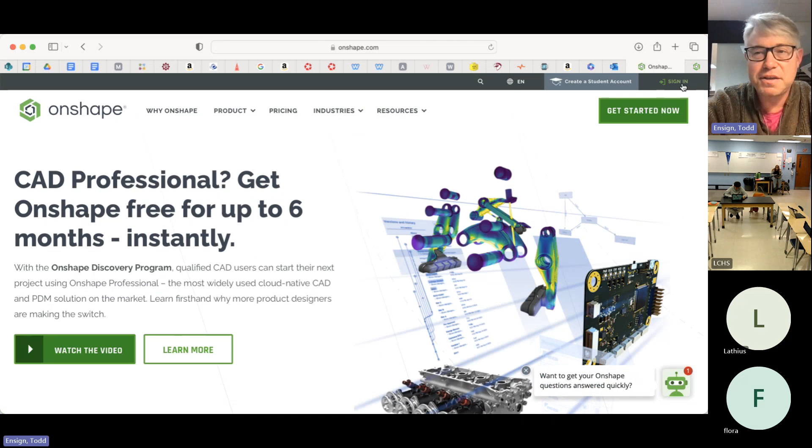Once you've created your account, you get to this page, which is OnShape, and you'll click on the top right corner, sign in. It's not important that you follow along with me right now. What's important is that you take some notes. Maybe if you want to try something out, that's great, but basically what's really important is that you take some observations and notes.

The next thing that we want to do is open up apogeerockets.com, because using measurements are critical to the success of this program, and I often need measurements.

So the measurement that I need right now is that I'm going to build something simple. I'm going to build an engine tube and a centering ring. So we'll start from the bottom of your rocket. The body tube on your rocket is a BT80, correct? Yes, Todd. So I'm going to go to building supplies.

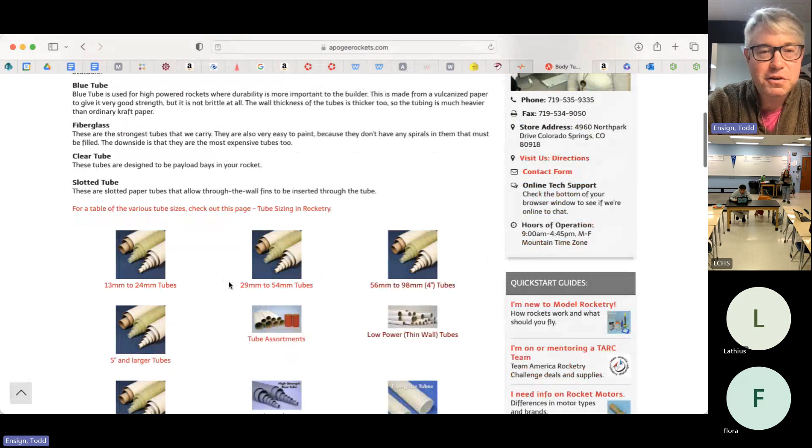I'm going to go to body tubes, and I'm going to look for 56 to 98 millimeter tubes. I'm going to scroll down until I find the standard BT80 right here.

Now the reason I like this website is, drum roll, this little box right here. Tim Van Milligan, also known as the Rocket Guy, or Rocket Man, takes very careful measurements and publishes them on his website. So I need to know the inner diameter of a BT80 tube in order for me to make my next series of parts. It's 65 millimeters.

So note number one, make your OnShape account. Number two, everything you do should be in millimeters. Every 3D printer I've ever worked with in my life defaults to millimeters, so please just get used to dealing with that.

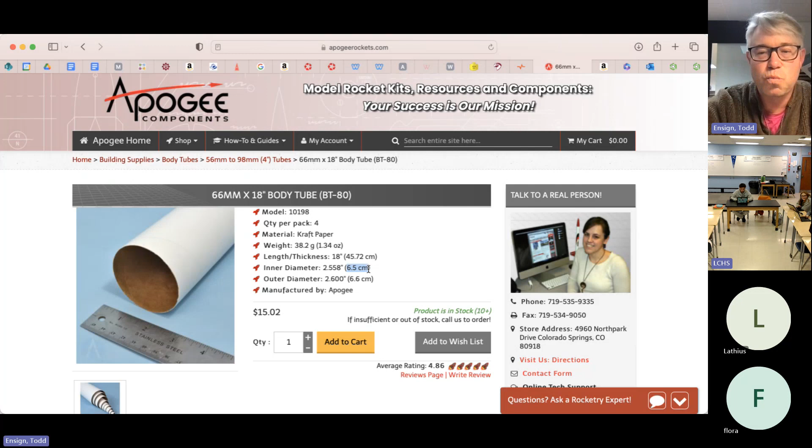2.58 centimeters is 1 inch. Write that down. 2.58 centimeters, or 25.8 millimeters, is an inch. Or is it 25.4? Someone check me on that. Someone Google that. I think it's 25.4, 25.8.

So what we're going to do is create an engine tube and a centering ring. To create a new part, I hit create on the top left, I hit document. I'm going to call this a 29 millimeter engine tube, and I'll say demo just because I know what it is.

Now, with an engine, I assume you're all going to use 29 millimeter engines. I have a free tip: if you're not using a 29 millimeter engine, you might use a 24. Still build your rocket with a 29 millimeter motor mount. Why? Anyone know why? Anyone? Bueller? Why would I always build a 29 millimeter motor mount, even if I'm going to use a 24 millimeter motor?

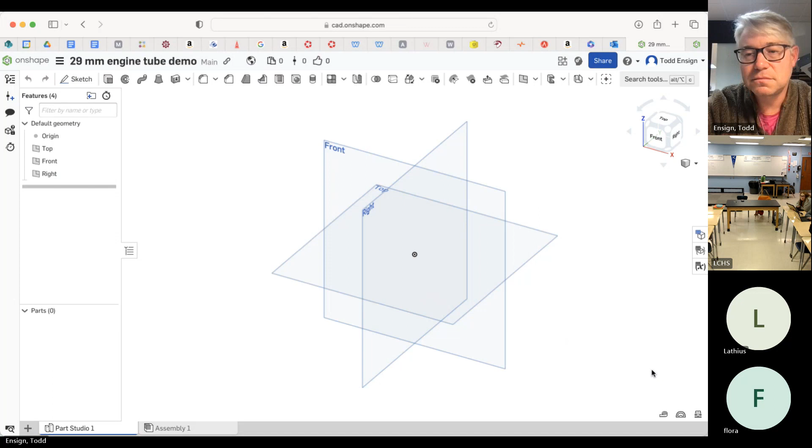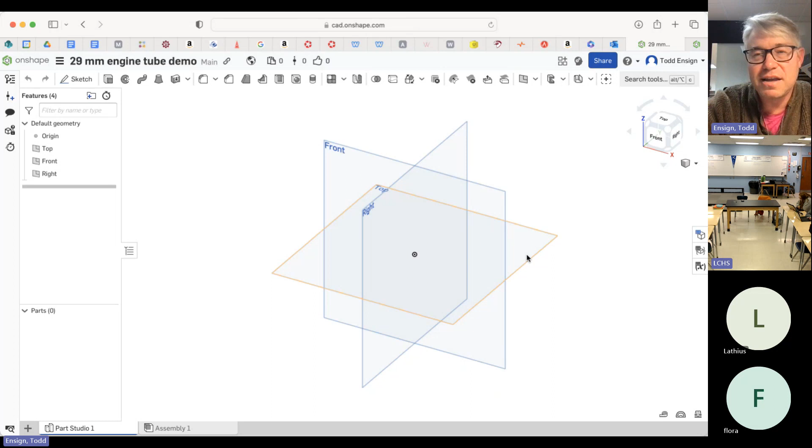Any ideas why? Can you put a 29 millimeter motor in a 24 millimeter engine tube? No, sir, the motor is too large, it will not work. But you can put a 24 millimeter engine in a 29 millimeter tube with a small adapter. So you can print a 29 to 24 millimeter adapter, even if you have any rocket. So always build with a larger rocket engine diameter and step it down with an adapter if you need to.

Okay, the first thing I do when designing this engine tube is click on the top work plane. There are 3 work planes: top, front, and right. I like to also hit this little orientation box and center myself up.

Then there's a button right here, and if you've never used 3D CAD tools, they all have the same basic functionality. You start with work planes, you sketch out what you want in 2 dimensions, and then you make it 3-dimensional. And if you want some icing on the cake, you can then tweak your 3-dimensional object. But first thing I'm gonna do is click the sketch button.

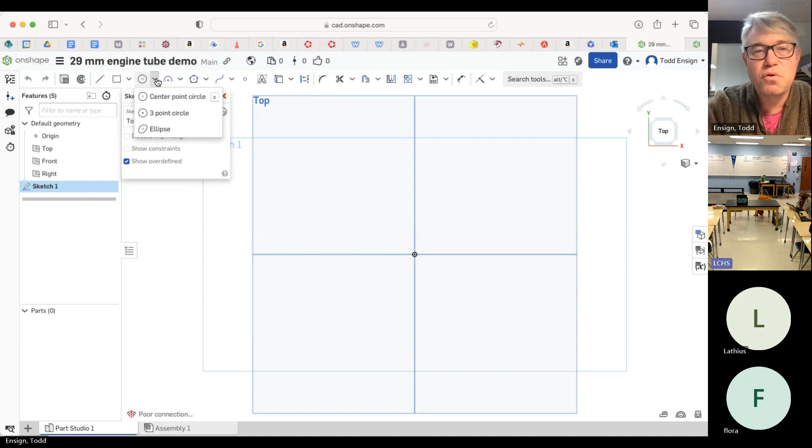Now a whole palette of tools popped up that were not there before. These tools are basic shapes: lines, squares, circles, arcs, inscribed polygons, splines, etc. What I'm going to do is choose circle, and there's a variety of circles. I want center point circle, that's the default one. I'm going to click inside on the origin and start to draw my circle.

Just note, I tap with my mouse button once, and when I do that, I have no idea what the measurement is right now. It's 53 millimeters, but by clicking once, it enters an edit mode. Now the diameter of the engine I'm going to put in is 29.

If I make this exactly 29, it'll be a tight fit. You may not get your engine in and out of your engine tube. So I'm going to go 29.1. I type those numbers on my keyboard and press enter. I've now made a 29.1 millimeter circle. I'm going to do that again.

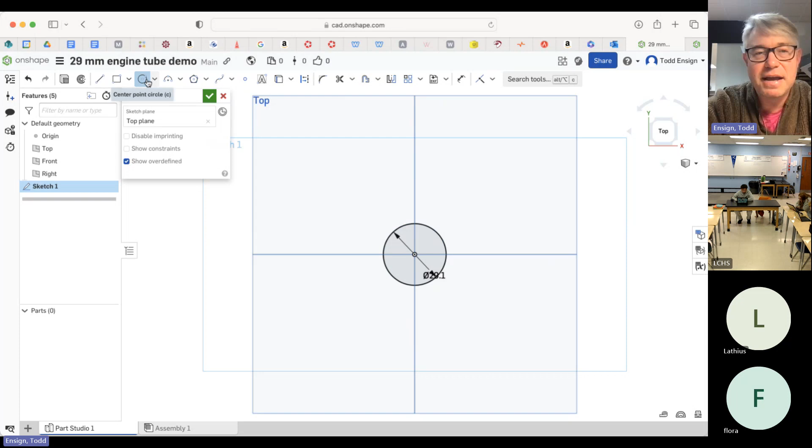I already have the center circle button on. I click, I drag. Now here's where you need to do some math. How thick of a wall do you think we want on an engine tube? What is your guess? How many millimeters would you like?

0.61 millimeters - so that's if you were doing a paper tube, right? That's what you're looking at, the measurements off of Apogee Rockets. But we're not doing a paper tube, we're doing a plastic tube. If you do a 1 millimeter thick tube, you could crush it with your hand easily, you could break it - that's probably not strong enough. So 3 millimeters is a little overkill for a tube.

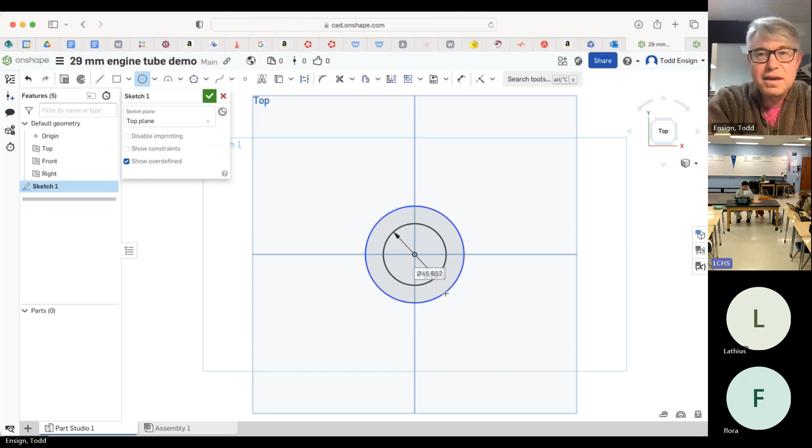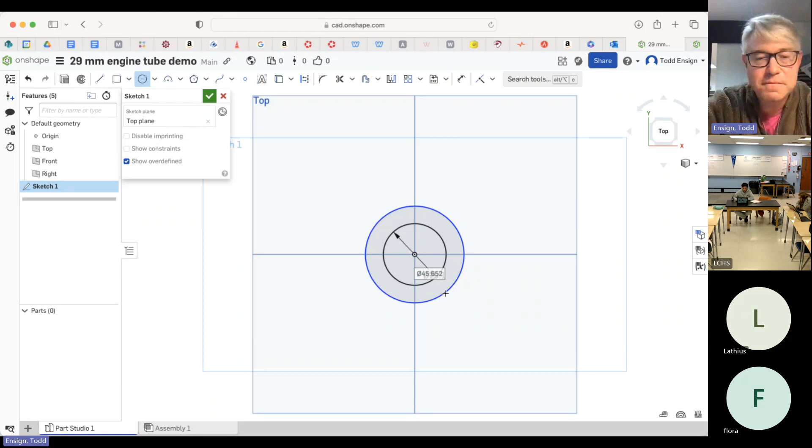So I'm going to suggest 2. If we had a 29 millimeter hole in the middle, I realize it's 29.1, and we put a 2 millimeter thick wall on each side around this, it's not 29 plus 2, it's 29 plus 4 to get the outer diameter of this tube. So 29, 30, 31, 32, 33. So 33 millimeters is going to be the outer diameter of my engine tube - that's just slightly less than 2 millimeter thick walls.

When I'm done with a sketch, I click the green checkbox - that means I'm done sketching. Over here on the orientation box, I'm going to say isometric so I can see it. Now the palette of tools has changed again - these are all tools that affect a 2-dimensional object and turn it 3-dimensional.

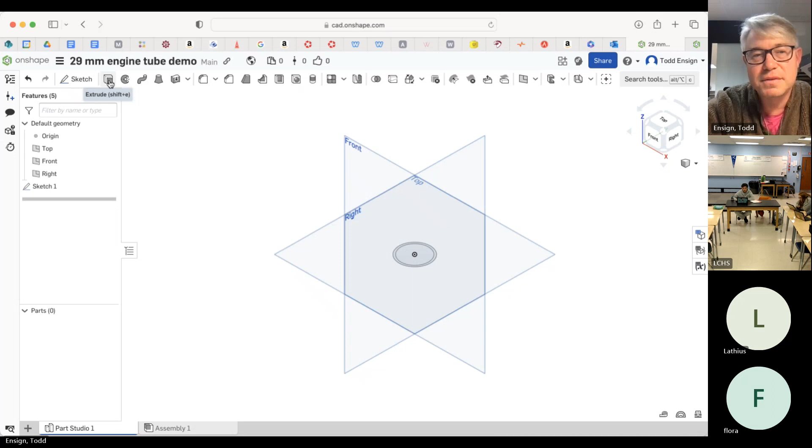The most commonly used tool is - anyone? Extrude. I click extrude and it defaults to making a new material, solid, and it says give me a shape - what do you want to extrude? So what I want to extrude is the space between these 2 circles. I click on that space and it extrudes it out.

Now extrude is like squirting something out of a shape. I don't know if you ever played with Play-Doh when you were a kid, but my kid had a Play-Doh device where you'd shove Play-Doh into a little piston. You put different shapes like a triangle, a circle, or whatever, and then when you push it, it would squirt out the Play-Doh in that shape. If you haven't seen that, I'm assuming you've all brushed your teeth - when you squirt your toothpaste out, it comes out in a cylinder, right? It's not a cylinder inside the toothpaste tube, it's just coming out of a round circle opening.

And so we're extruding or squeezing material out. Ironically, this is what a 3D printer does to a certain extent - it extrudes out a tiny little nozzle of plastic.

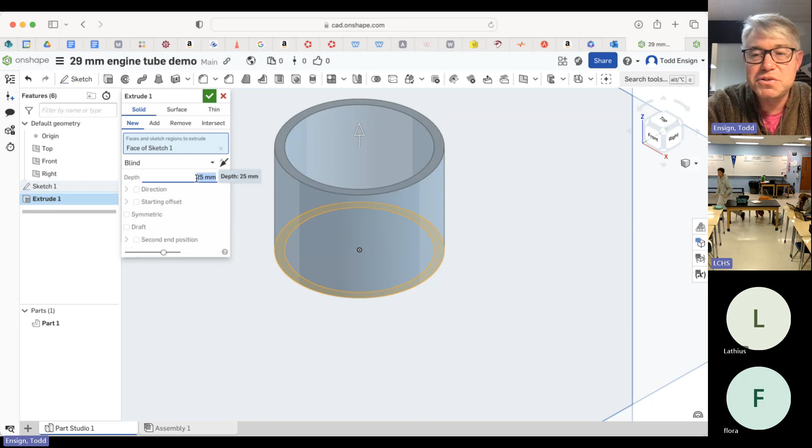Now it says my default guess - the software is guessing 25 millimeters high. I'm telling you right now that that's not big enough for your engine. Most engines, if you start looking them up, your F engines are going to be at least 70, 80 millimeters. Let's say 100 millimeters. I've now created a cylinder that is 100 millimeters long.

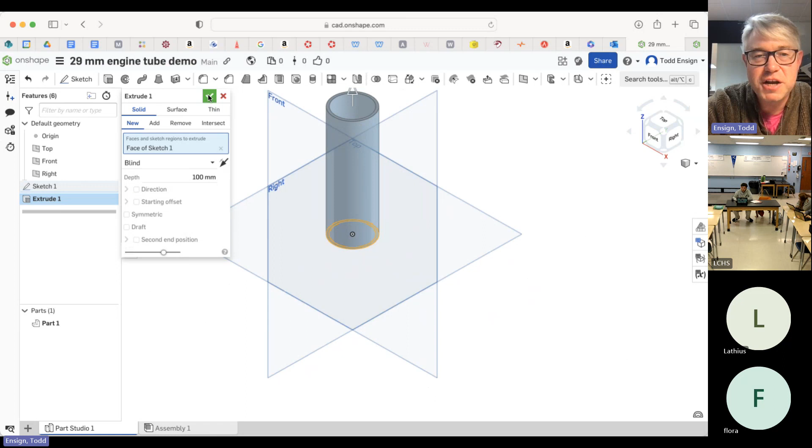I'm going to click the green checkbox again. That was it, we did it. We drew 2 circles and we extruded it - 3 steps, actually really only 2 steps.

For those of you who have not done 3D CAD before, what do you think? Is this easy? Is it scary? Is it confusing? Simple? How are you feeling? It looks pretty simple, pretty straightforward, huh?

Yeah, now let me show you how to get this to a 3D printer. I have a part, and because we're on OnShape, it's already saved. Down here is our feature tree - it shows us all of our work planes, it shows us our sketch that we made, it shows us the feature we did called an extrusion, and then down below it shows 3-dimensional parts that were created.

I click on that part - see how the whole part's highlighted? I'm going to right click on that part, and one of the options says export. If I export it, it says what do you want to call it? I'm going to call this an engine tube.

29 millimeters. The format is STL, that's what 3D printers are going to read. Units are millimeters. Resolution.

Now this is a critical thing here. Not all software works the same, but if you're drawing a cube, it's just all 90-degree angles. You could go with coarse resolution because an STL file is made of triangles, and a cube would have 2 triangles on one side, 2 on the other. It could have the lowest resolution.

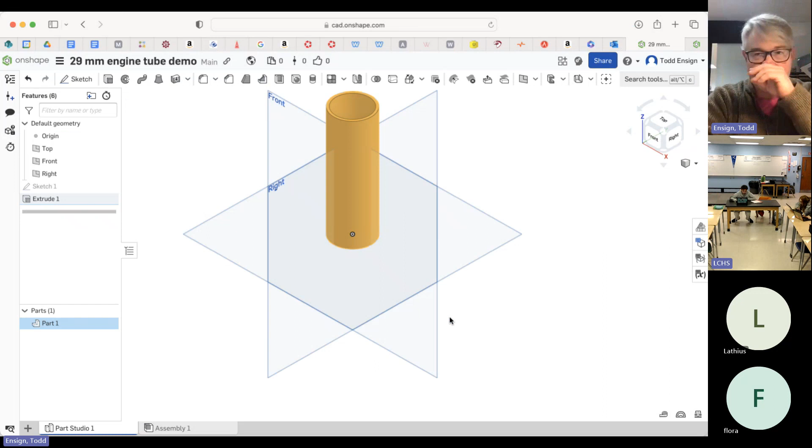So choose fine resolution, and it says download. I'll go ahead and export, and that should create the part. It downloads it, and if I look in my downloaded files, I will see it.

I'm now at this point, I think you might not see what I'm looking at, so I can open that file up. I downloaded it to my computer. That's how I get the shape I designed out as an STL. Any questions?

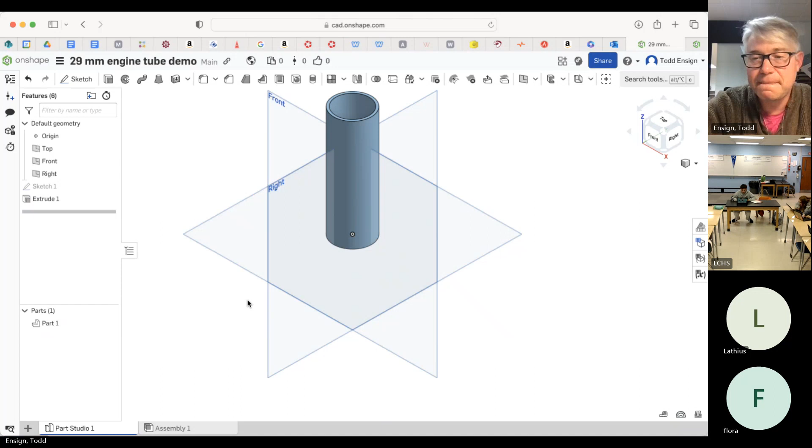Let's make a new part. I now have the engine tube to stick my engine in, but I'm going to create the centering rings. These are going to be BT80, and they're going to be 33 inner diameter, which reflects the engine tube they're going to connect to.

Now, if you were lost last time, watch quickly. I'm going to click on the work plane, square up to it, go to the sketching tool, go to the circle tool. Centered is default already. Okay, I'm going to draw a circle.

Now the inner circle is going to be 33 — that's the exact dimension of the outside diameter of my engine tube. And a minute ago I said, if we're doing an engine tube, make sure it's a little bit bigger so our engine slides in. I want this to be a tight fit, super snug. In fact, if it's too snug, I can just sand it a little bit.

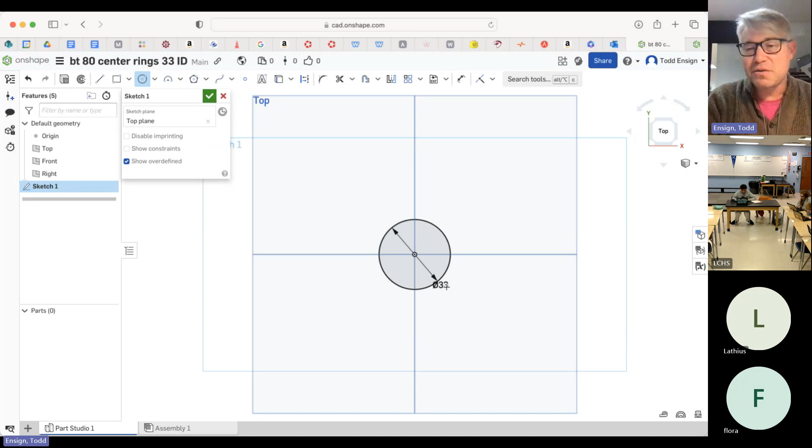I'm not worried about it being a little too snug, I'm worried about it being too loose. So if you make the exact measurement, 33 outside, 33 inside, it should be a tight fit, and a little bit of super glue is going to fuse those things together rock solid. So that's going to be my inner diameter.

I'm going to make another circle, also from the origin. Now how big is it going to be? Good question — what was the pop quiz inner diameter of our BT80 body tube? Want to see that? 65 millimeters, 6.5 centimeters.

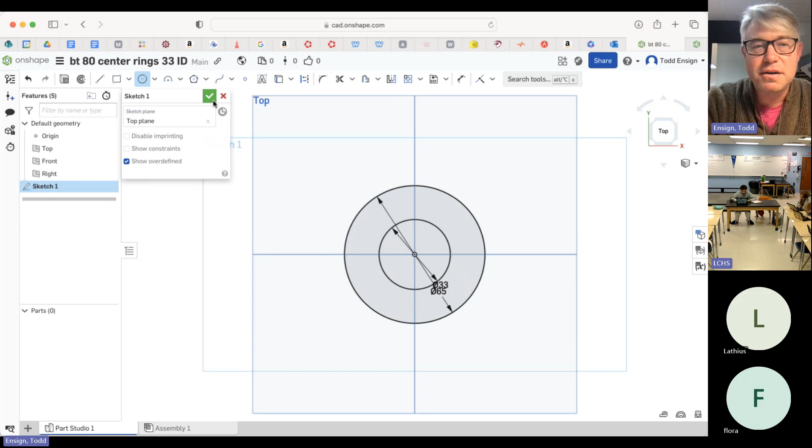So I'm going to type in 65 millimeters here. Again, I want a tight fit. Okay, I'm done, the green checkbox. Let's look at the isometric, the three-dimensional view. Let's go to extrude, the first button right after sketch.

It says, what do you want to extrude, Todd? I click on the space between those two circles. It says — I'm just going to guess my standard guess — 25 millimeters thick. Do you think this looks like a good centering ring to you? Yes.

Okay, let's go to Apogee. Let's go to another Apogee page. Let's look at a centering ring. If you've built a rocket before, usually it's out of a piece of thin plywood. So under shop, we're going to go to building supplies, then centering rings. Let's look at a centering ring for this kind of thing here — we are looking at BT60, BT80 body centering rings.

Okay, this is a centering ring for a 24 millimeter — it doesn't really matter, I'm just looking for the thickness. Okay, thickness: 3.2 millimeters. So these are a thin piece of wood. Back to my drawing, that's currently 25 millimeters.

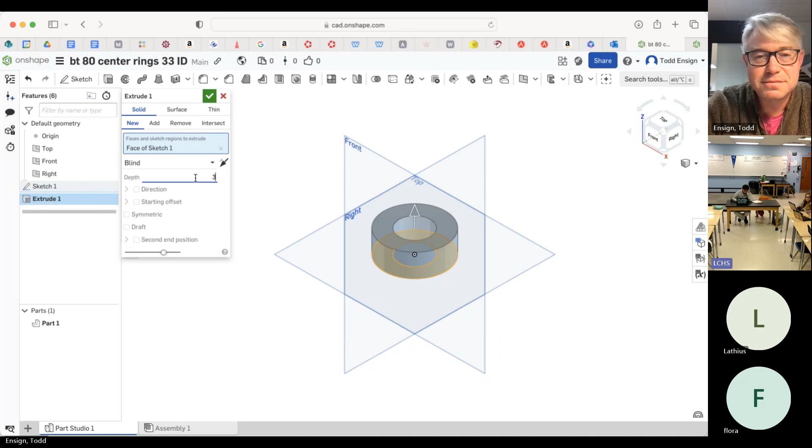I'm gonna suggest to you 3 is fine. If you want to do 3.2, it's fine. If you want to do 4, you're getting a little thick, a little carried away. If you did any more than 4, it's excessive, I would say.

If you did 2, I've broken them. They've destroyed. So 2 millimeters is fine for our cylinder. 3 millimeters is what I recommend for a centering ring.

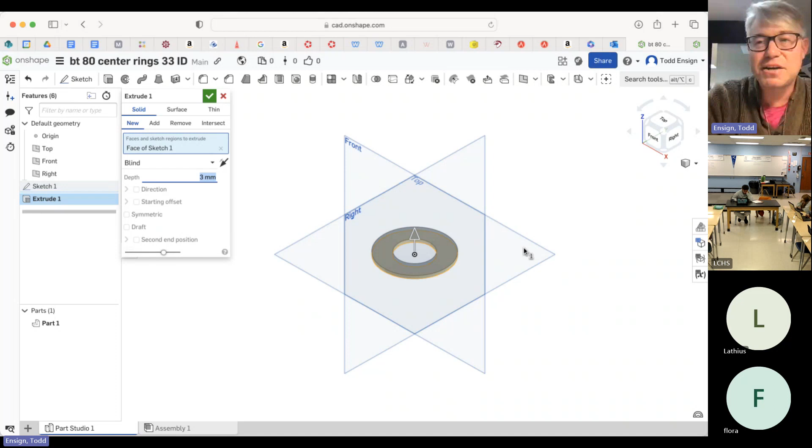So I've extruded it, I hit the checkbox. I export it out by right-clicking. I click on the part, I right-click on it, I say export. STL, fine. I give a name. This is my BT80 center ring for 29 millimeter engine tube. Export it out. Saved. Done. Questions so far?

How are we doing? Question: so you said that it can't go below 2, right, for the center rings?

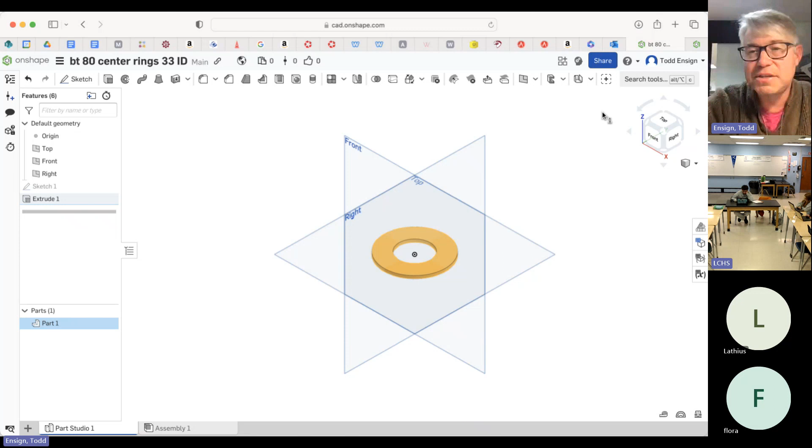I'm giving you Todd's free tip that 2 millimeters in the reality of 3D plastic parts is a little too thin. It breaks. I would suggest 3 millimeters. If you want to do 3.2, which was the exact measurement of this wooden part right here, that would be fine. 4 is probably a little excessive, but if you want to add weight to your rocket, you can do 4. If you're doing more than 4, I think you're getting a little carried away.

All right, thank you. Sure. I'm not sure what's harder or easier next. I think they're both the same. I think I'll probably do a nose cone next.

So we are using a BT70 body tube for our nose cone, correct? I'm sorry, for our payload bay.

So what I'm going to do is pull up this Apogee Rockets page. Let's go back one page. Let's find our BT70 body tube. Here it is, here's my measurements. The inner diameter is 55.4. My outer diameter is 56, apparently. Okay, so these are important measurements for us to know to make our nose cone.

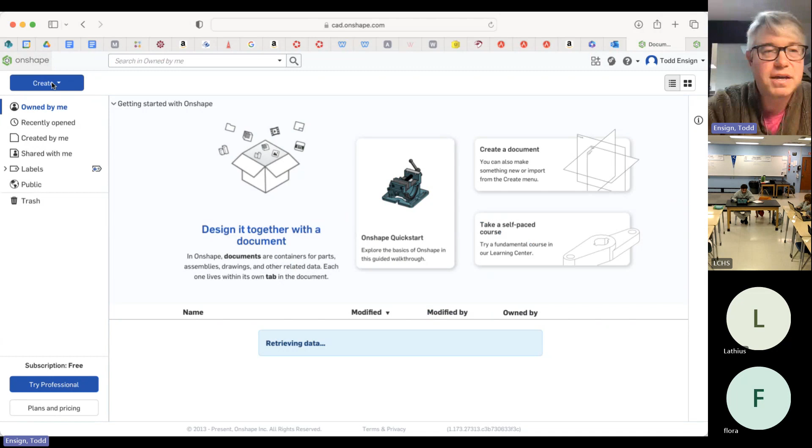So we'll go back to OnShape. I'm going to make a new part. Click on the word OnShape, click Create, click Document. This is going to be a BT70 nose cone.

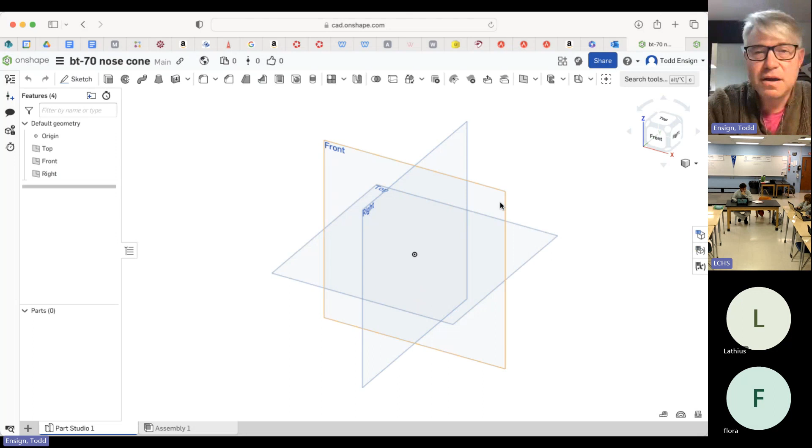Now I'm going to need your help with me, I have some math to do. I'm going to work with the front work plane, square up to the front. I'm going to click my sketching tool. We are going to create half of a nose cone, a bilateral, cutting it right down the top.

The first thing I'm going to start with is the very bottom, and this part I can start without too much guesswork. I know that my BT70 inner diameter is 55.4. Can someone tell me what is half of 55.4?

27.7. Great. So I'm going to go to my line tool. See this little line tool? Click on that. I'm going to go to the origin, snap, and start drawing my line. It doesn't matter what I do because I'm going to tap my mouse once.

I'm going to type in the number. You said 27.7? Yes, sir. Enter. I made a line, 27.7. It shows the dimension there.

This is half of the part of the nose cone that's called the shoulder that will slide into the body tube. I recommend that you go up at least an inch. It's 25.4 — my brain was glitching before. 25.4 is 1 inch, right?

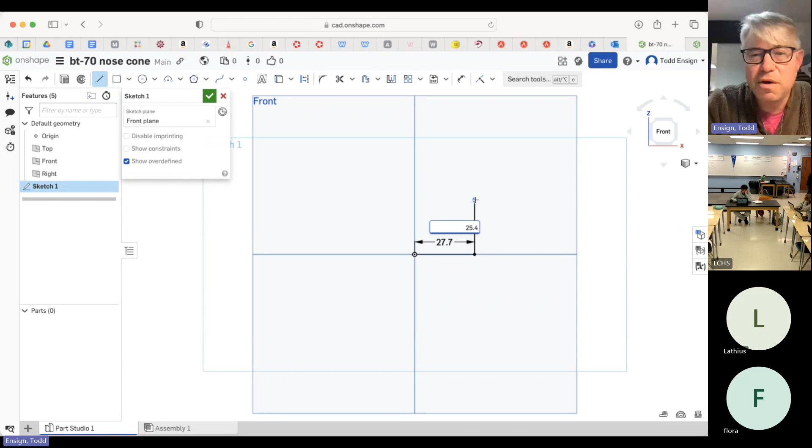So let's just say I go up 26 millimeters — it doesn't really matter, but something along those lines. We'll do 25.4 to be exact, 1 inch. So 25.4 is exactly 1 inch in millimeters. So that's how high up this shoulder is that's going to slide in.

Now I like to give at least a 1 millimeter lip here. So I click on the button right here, I type 1, there's that little tiny lip. Now I'm going to press the escape button and let go of this line.

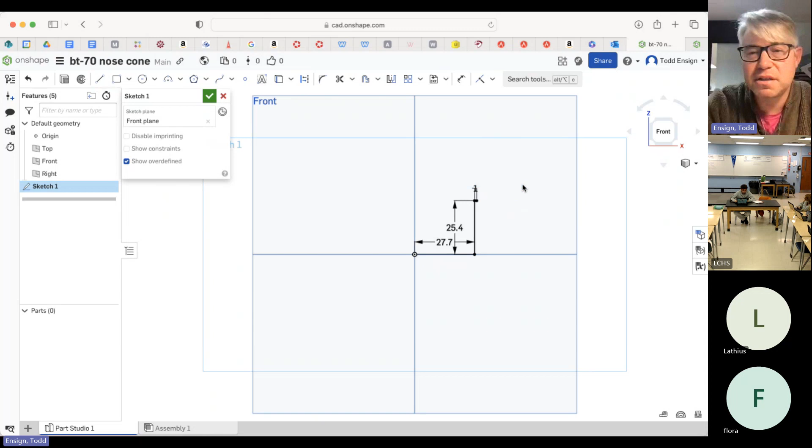The next part is how tall of a nose cone do I want? Question: how tall can your 3D printer go? Anyone know? That's the limiting factor here.

Now, if we looked at Apogee Rockets and said, okay, give me a nose cone example so I have some idea of what a common nose cone is going to look like — Apogee Rocket seems slow today. Go. 24 millimeter tubes to 54, 56. Okay, so I think that's us right there. Here's a BT70 nose cone right here.

So how long is the shoulder? They say it's 58 millimeters. Too long. And they say the length is 267 millimeters. I'm just moving the decimal place one place over. 26.7 centimeters... 26.7 centimeters. That would make a nose cone.

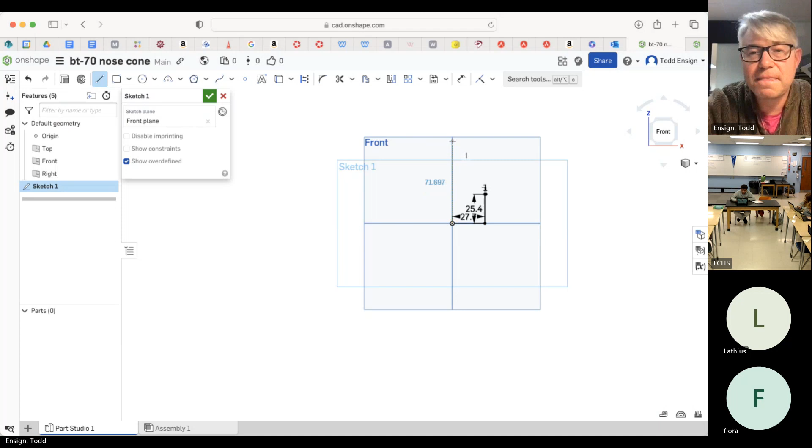I'm going to click on the line tool. I'm going to start drawing a line from the origin straight up. Okay, and so I'm going to press escape again. Actually, no, I'm going to have to have a number. 250 millimeters. And now I'll press escape.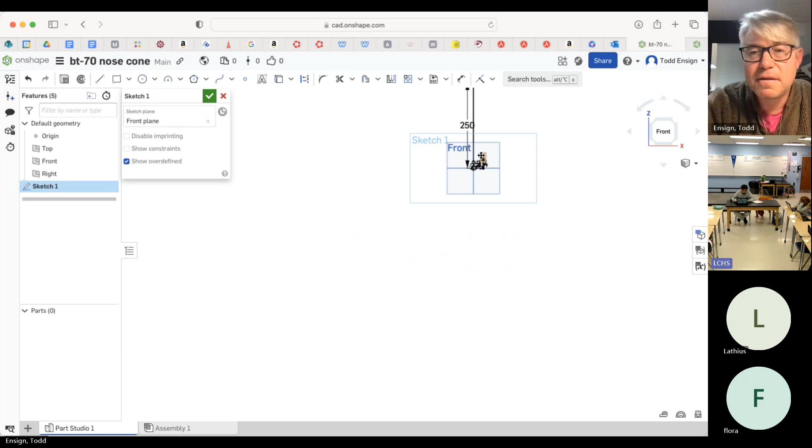So what I've got now is I have a shoulder, and then I have this tall nose cone area. And you're probably thinking, I don't get it, Todd. It does not look like a rocket to me yet.

What I'm going to do next is zoom in on that little dot where I have that 1-millimeter lip. I'm going to look through my tools for drawing. I have line, rectangles, circles, arcs. Arc sounds cool. In my arcs, I have 3-point, tangent, center point, elliptical, conical. I'm going to try a 3-point arc.

I'm going to click 1 point of my 3 points on that outside little lip of that 1 millimeter. I'm going to click the other dot of my 3-dot arc on the tip of my nose cone, which is that other end of that line I just drew. Now my third point is the one where I'm going to figure out where to put it. Up to me where I put that.

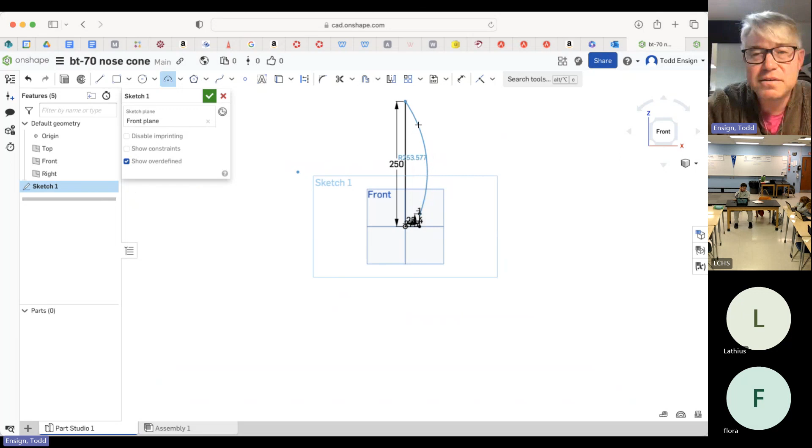So I can control the shape of my nose cone right now. I can have it look like the top of a Russian church. I can have it scoop in like that, what looks really pointy. I can have it kind of linear. I can have it kind of curved out from whichever point I want. I kind of like this, this is looking good to me.

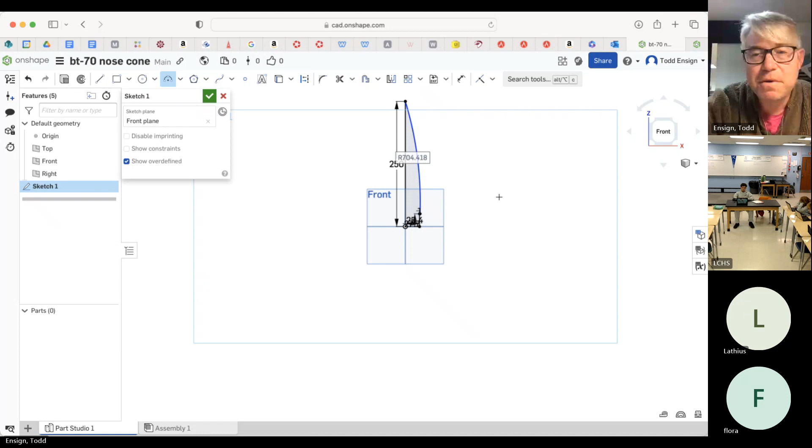This is not a measurement right now. I'm just doing it by feel, but I did a 3-point curve. Can everyone see how this shape just colored itself in? It's now filled in gray. That means the software is telling you, you have a shape with all the sides closed. In other words, I don't have an opening anymore.

This is a shape that can be manipulated in CAD. If I failed to touch 2 dots and had a space between them, this would not fill in, and I would be in a bad place right now. I have to go figure out where I missed. I have to probably do an undo button. There's an undo button right over here. So if you mess up, undo is your friend.

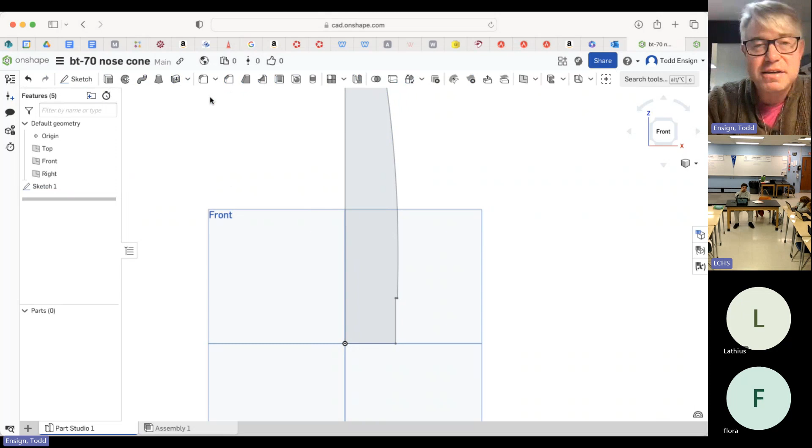I'm going to click the checkbox. So now I have this 2-dimensional half profile of a nose cone. Does anybody know what I'm going to do to make this a nose cone that I can put in my rocket yet? Do you know what feature I'm going to use?

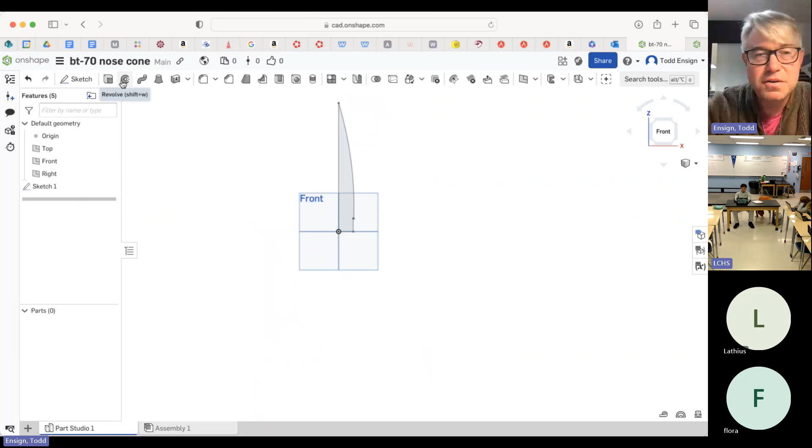Extrude, revolve, sweep, loft, thicken. Any one of these? Extrude. The answer is revolve. Click on revolve, and it says, okay Todd, what shape are we revolving? Give me the profile that I'm going to revolve. And I choose this shape.

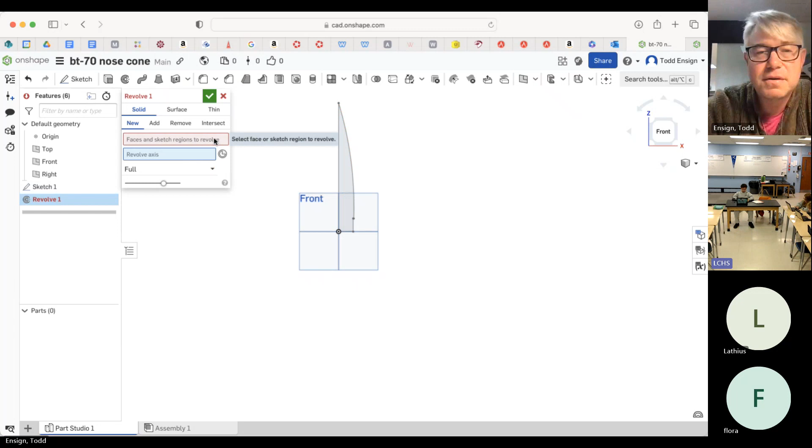Then there's a red box that pops up and it says, give me the axis. What am I revolving around? And I'm going to click on the very long axis of the middle here. Oops, didn't do it. Faces, axis, and then faces.

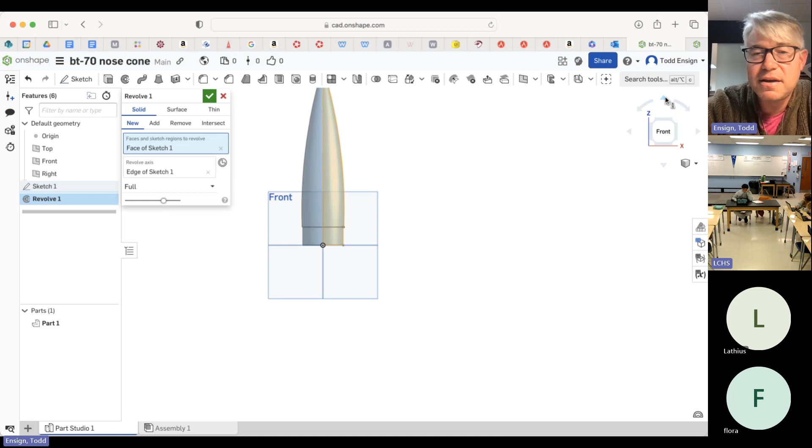Like I said, I have to click on the box and tell it. So I click on the face, and then I click on the axis, and it says, oh, I think you want to make a shape like this. Does anyone see how this is now a nose cone? And you can see, interestingly, there's that little profile, and then it's spun around this long axis right here. I click the checkbox, it's great.

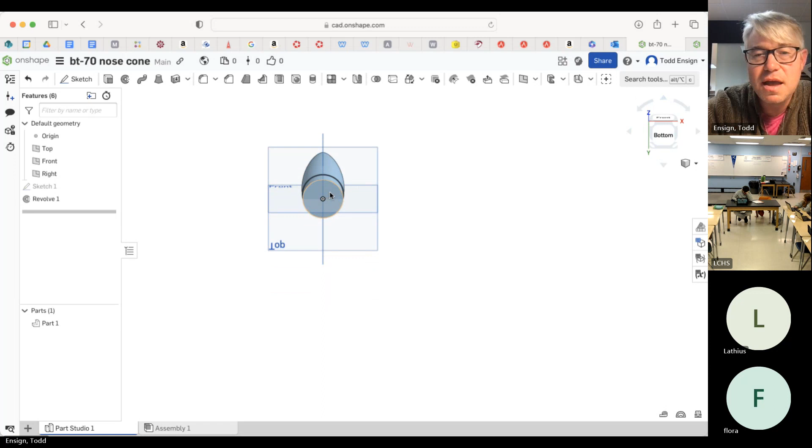Now, the one problem I have is this is a solid plastic nose cone right now, literally filled with plastic. This would be a little too heavy for us. So I'm going to spin this around using my navigation tool. I'm going to click on the bottom. So I've now highlighted the bottom of this nose cone. And look at these features.

I have additional features that I can apply to already dimensioned objects that are 3D. I can curve the edges. I can shave off the edges. I can draft, rib - that one sounds cool. Shell solid - click that. It says, Todd, how thick of a wall do you want? It defaults to 2.5 millimeters.

That's not a bad choice, to be honest. 3 is probably a little thick. 2 is probably a little thin. I'm going to go with their default. I'm going to say 2.5 is cool. Checkbox. I have now made a hollow nose cone.

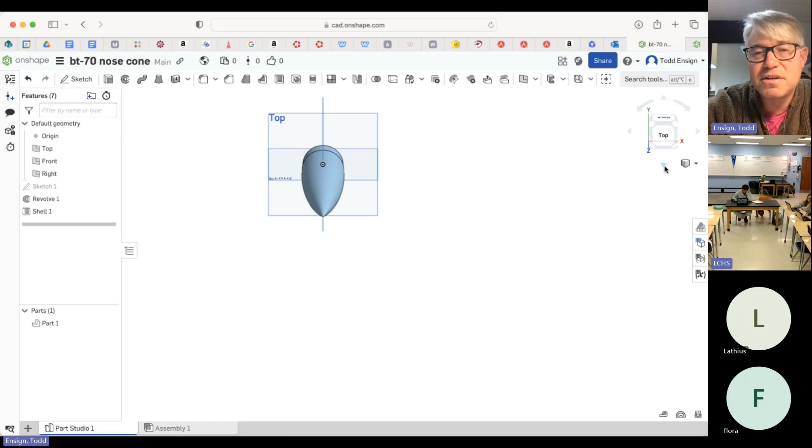That's going to be designed for a BT-70 payload bay. This particular nose cone is 275 millimeters tall, I think. You'll have to look at your printer and see if it can accommodate that. You might print a smaller one, or maybe you'll have even more space. It depends on your model printer.

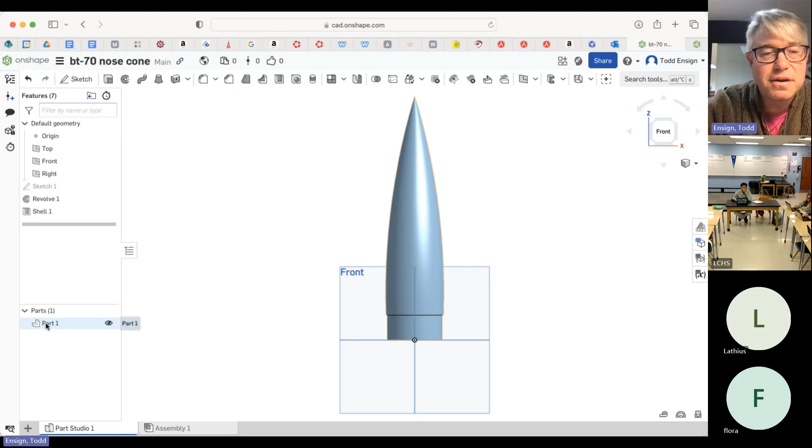To get this part out, I click on the word part, right click, say export, give it a name, BT70 nose cone, STL, fine resolution, download, export that out.

Done. All right, that was a little more complicated, right? Did I lose anybody? How do you feel? Thumbs up, so-so, thumbs down? All right, I got at least one thumbs up.

The last part is the most complicated. So let me see if I can share something else with you. Let's see, stop sharing. Let me jump over to Open Rocket.

After our last session, we had designed a rocket using Open Rocket, and in that rocket we actually had a transition piece. That transition piece has to take us from our payload bay, which is a BT70, a thinner tube, to a BT80, our booster, which is a larger diameter tube.

Let me share my screen with you. Window.

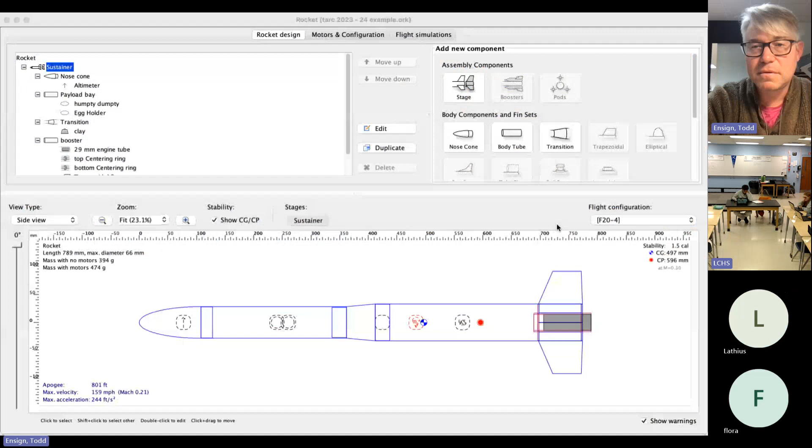All right, we can see it now. Great. So what part am I talking about? I'm talking about this part right here. Can everyone see that part? Yes, sir. Okay, let's look at that in 3D.

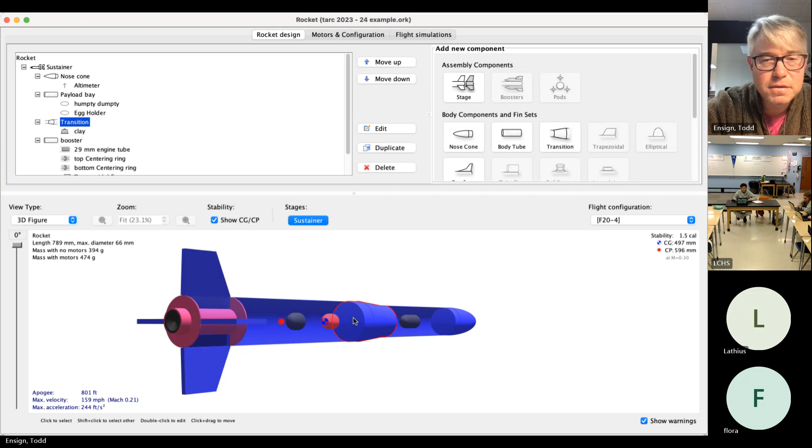All right, zoom in, right? So the piece right here has a flat bottom on it, and it has a little shoulder that goes inside the body tube. It has this diagonal piece, and then it has another shoulder that goes into the upper body tube.

Not sure how it looks best to look at it. Here you can kind of see it. Now it kind of disappears, but you can see it's got the shoulder. That's the part we're talking about building right here.

So if I open up the transition piece, you can't see the window now, can you? You can only see the main window, you don't see the transition window function. Okay, it's okay, I just want to make sure that we are on the same page of what we're building right here.

So that piece looks like it sticks up about an inch into the body tube, about an inch to the body tube. And it has a diagonal length right here that is, let's see, 50 millimeters is the height of our diagonal piece.

And we have shoulders that are 25.4 millimeters on either end. Okay, so I'm going to go back to OnShape now that I know what I'm building, and we're going to share that screen again. Let's see where I had it.

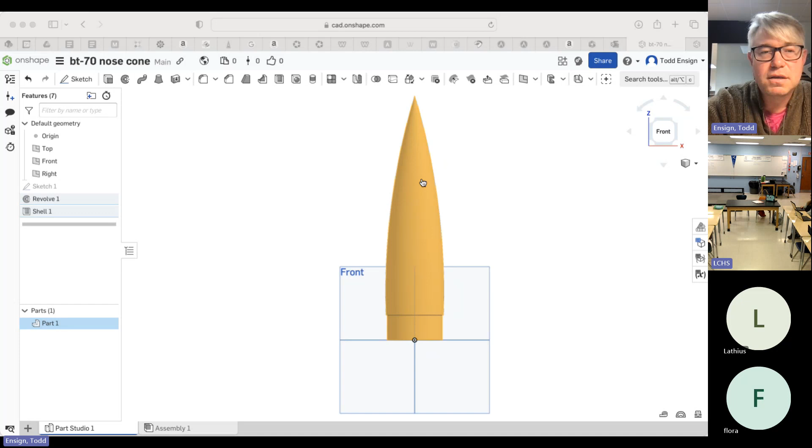Can you see my OnShape again now? Yes, sir. Great. I'm going back to the OnShape button on the top left, the Create button just below it, a document. I'm going to call this my BT70 to BT80 transition.

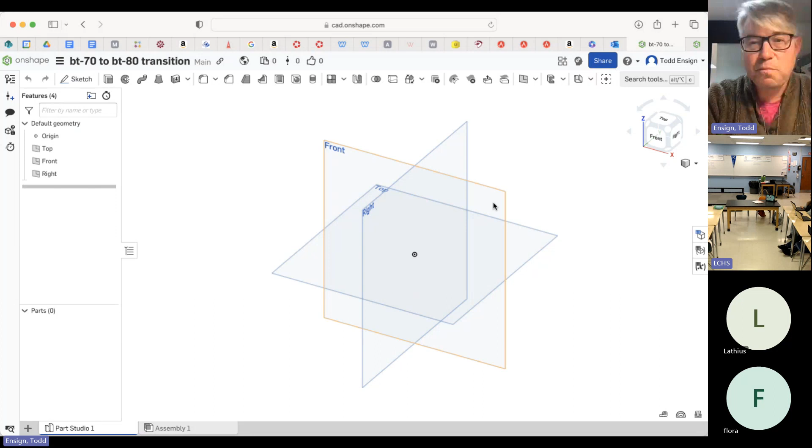We'll sketch this out in the front work plane. Click front, square it up, click sketch button. Okay, so what we're going to do is we're going to do half of our BT80 booster. So the BT80 — let's see which button was that. It's BT70, here's BT80. Okay, we did that earlier for our centering ring, right?

It was 27.7, half of the inner diameter of 65. Is that correct? Inner diameter 65, divided by 2 equals 32.5. Is that correct? So this is a

BT80 body tube with my booster. The inner diameter is 65 millimeters, right? So we want half of 65, and that gives me 32.5. That's not what we used before, did it? Was it? I think we might have made a mistake earlier.

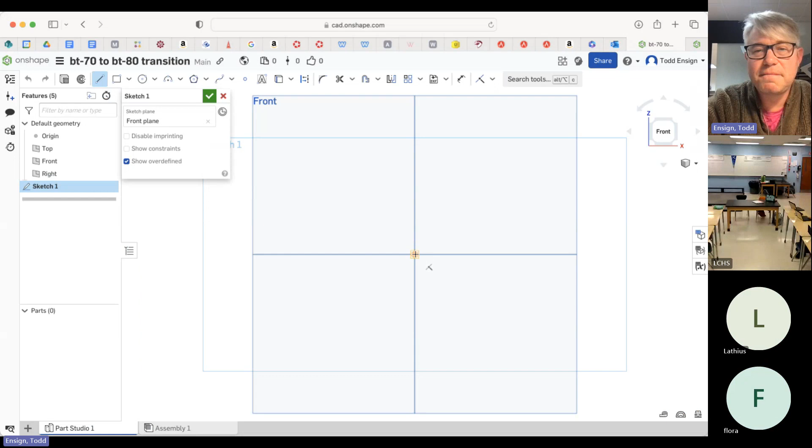Okay, so I'm going to go back to my OnShape. We're going to make a line. We're going to say 32.5, and that is going to be half of the part that slides into our BT80.

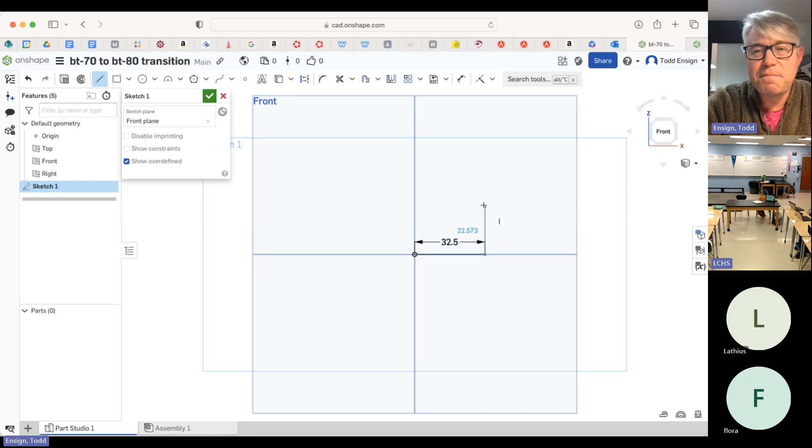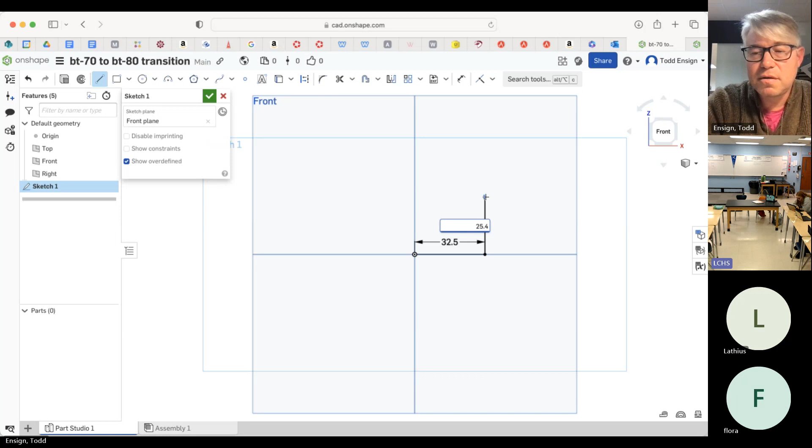I'm going to go up at least an inch. So I'm going to go up 25.4... that's 25.4. That's 1 inch in millimeters. Enter. I do need a lip.

If I don't have a lip, it's just going to slide through and into there. So I'm going to come out 1 millimeter and press escape. Okay, now if we have a 25 millimeter shoulder on either end and a 50 millimeter long transition, that's going to be approximately 100, right?

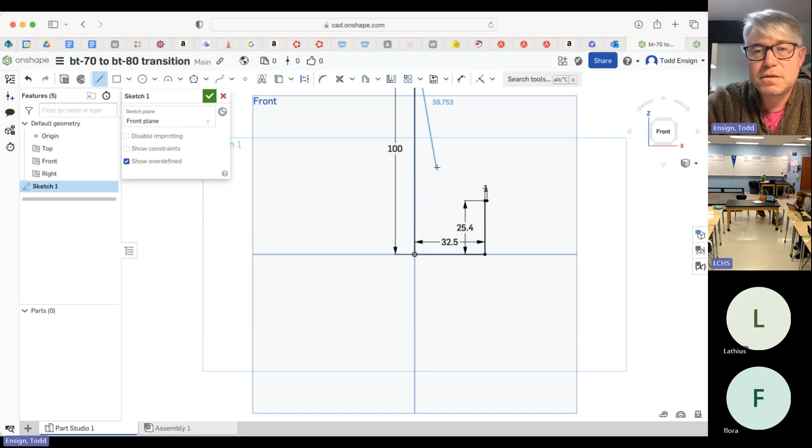25 plus 50 plus 25. So let's go ahead and make this 100 millimeters. And this is going to be the part that slides into our BT70 payload bay.

So the BT70, what's the diameter of that one? That's 55.4. So 55.4 divided by 2 — was that the 27.7? You guys have your calculator? 55.4 divided by 2.

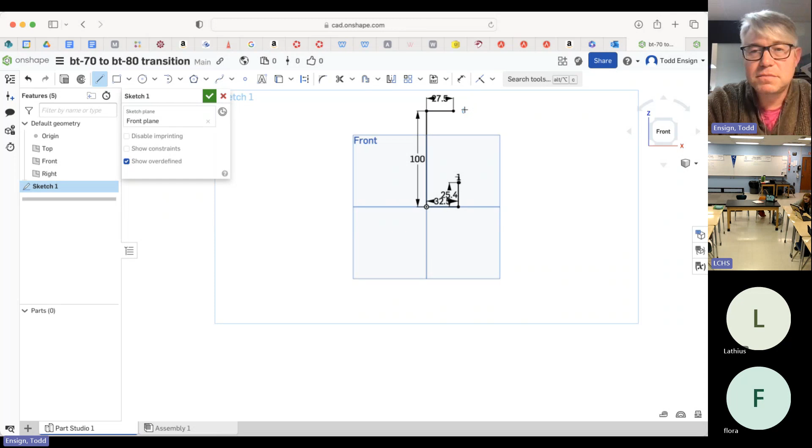27.5. Okay, so it's going to be 27.5. Yes. Okay. And then we're going to have that come down, slide into our body tube by an inch, which is how many millimeters? 25.4.

Okay, now I don't really need a lip on this one. I just need to draw a line down to here, down to that outside of that 1 millimeter. When I did that, you see how I colored it in?

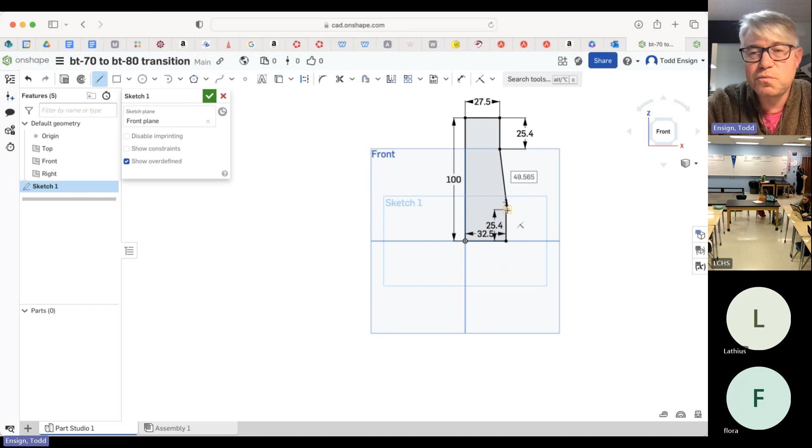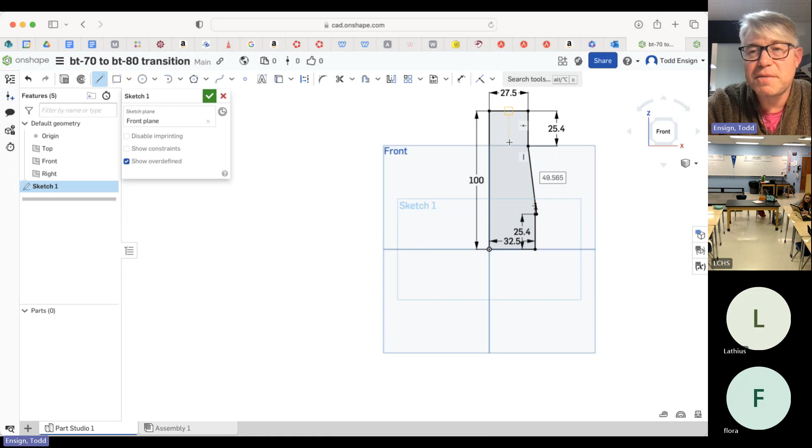So I have a 32.5, which is half of the diameter going into my BT80 booster, plus that little 1 millimeter lip right there. Then I have 27.5, half of the diameter going into my BT70 body tube, and it slides in an inch. It's filled in, which means it's a solid shape. That's what we wanted. Green checkbox.

Now remember the revolve tool. I'm going to click on the shape first, click on the revolve tool second. And it says, I already know the shape, now just give me the axis. Click on the word axis. There, and it makes my three-dimensional shape. Pretty cool, right?

So at this point, I'm almost done, except that this is a solid piece of plastic. So how do I make this not a solid piece of plastic? I believe it was called a shell. Can't remember.

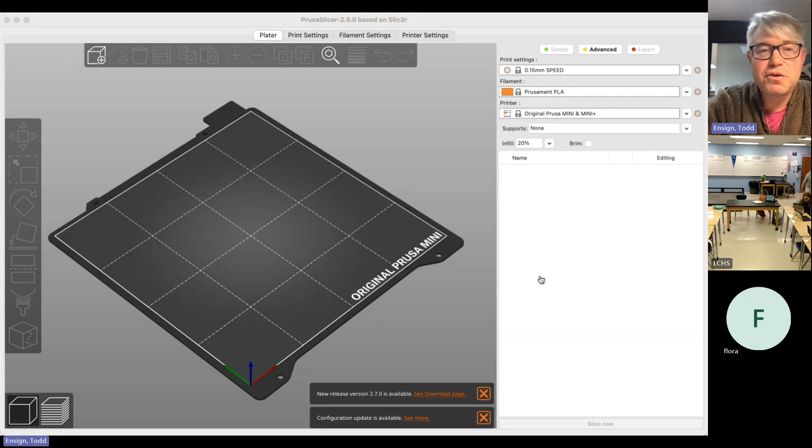Okay, I'm hoping that you can now see the Prusa slicer. Great. Okay, what I'm going to do next is go on the top left, and again, every software that slices for every printer is different. Your printer, if you have one, came with whatever software it recommends, but this software can be used with more than one type of printer. The functions are almost the same.

I'm going to click on the Add Part button. It's going to say I can read STL files. I see a transition, a nose cone, a centering ring. What would you like me to print? Centering. Okay, which is a centering ring. We can do more than one thing probably. Okay, I'm going to open that.

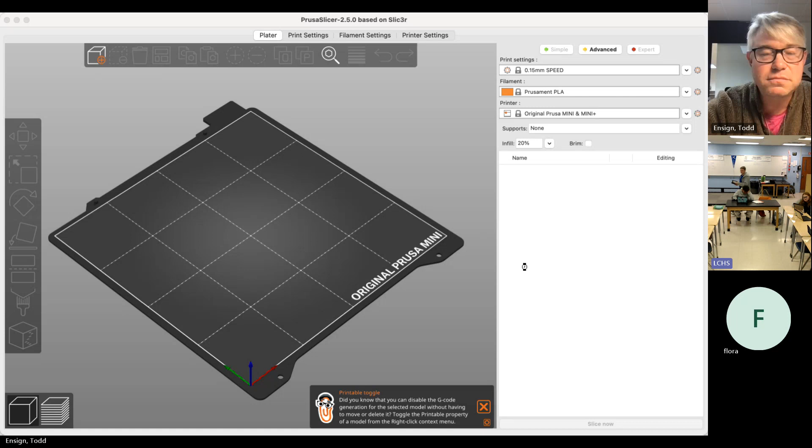It says I've loaded my centering ring. And in fact, I can drag this thing around because, you know what, I need 2 of these. So what I can do is add an instance of this. So we're going to have 2 centering rings, because it takes 2 to get my rocket to go.

Okay, let's add another part. Let's add our engine tube, and put it on our print envelope here. So there's an engine tube. It defaulted to printing it straight up, which is great, that's what we wanted. Add the part.

Let's add our transition piece. Okay, we'll slide that over here. It still fits in our print envelope. It's going to print the flat bottom down and the hollow opening up, which is great. Let's see, let's push our luck, add one more part on here. Let's add our nose cone.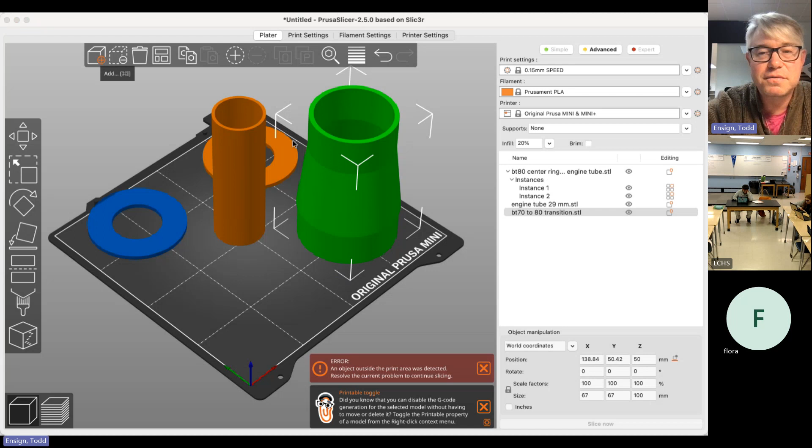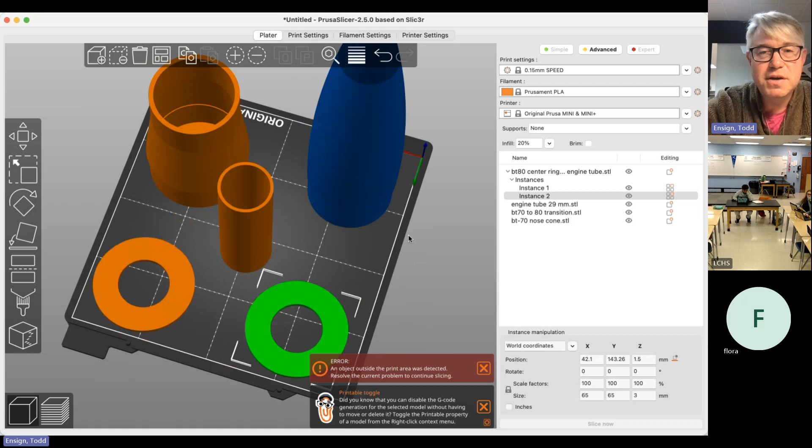Put it over here, and it looks to me like it all fits. Now I think I got blue because this is not fitting, so I had to slide it in. Now it's green, it's fitting. So I think for the Prusa Mini, my nose cone's too tall, this particular object was too big for this print envelope, so I'll delete that one out. But all these parts will print. I have other 3D printers in my makerspace, so I'll just use a different one for that nose cone.

Or now that I realize it's too big, I can go back in and redesign that nose cone. I don't want to make this workshop any longer, but again, I could go back into my nose cone, change the length of that one piece in my sketch file, and make it so it would fit. And at this point, I would just turn on my printer and send my file to it.

This software is really cool because what it's going to do is, if I go ahead and tell it—there's a little window my way here—if I tell it to go ahead and run this file, it'll actually generate the file I need. It'll let me preview the layers.

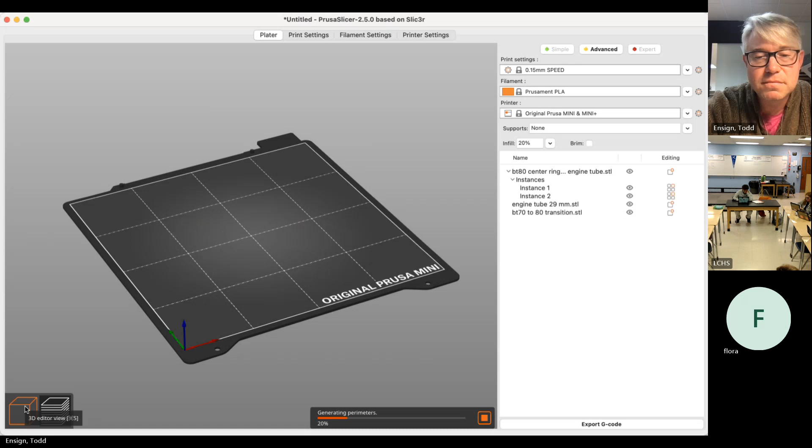It's actually generating it right now, generating my parameters, my perimeters. Generating G code, and it's almost done. It's 90% done. It's actually producing all the code for printing all these parts. I think I gave it a lot to print.

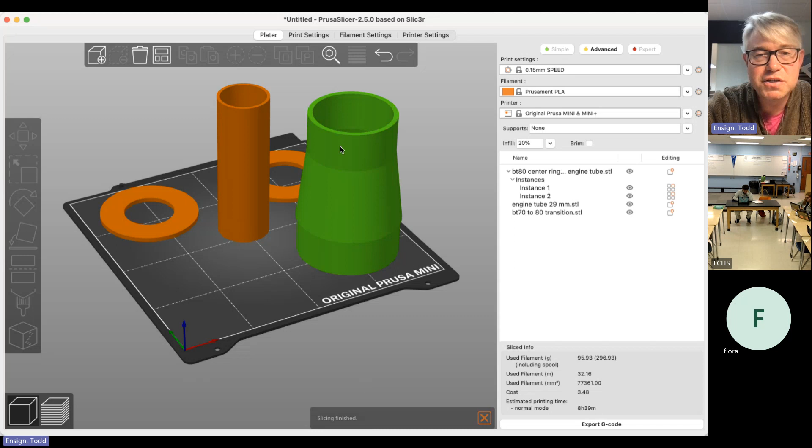Slicing is finished. So at this point, I can actually go down and slide through each part, and it'll show you which parts are being printed and which layers. There's a little button down here, and I can see it. It shows me the actual printer moving and printing those different pieces.

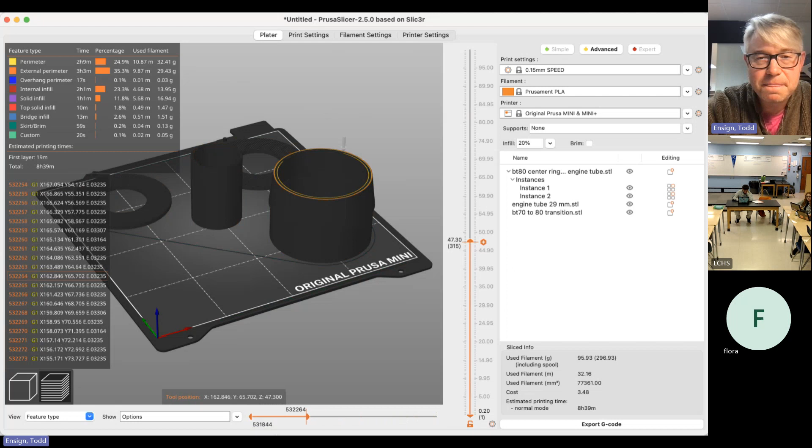It's pretty neat the way I can scroll through that. If you look, here's the different layers being printed. And I can even see, like I said, I can watch the 3D printer nozzle move around by sliding these different sliders. So it's kind of cool to see how the printer is going to print these pieces out.

This is called slicing software, and this is basically how it works. And this generates what's called G code, which is the code that controls how the printer moves. And there's lots of settings in it for tweaking it however you like.

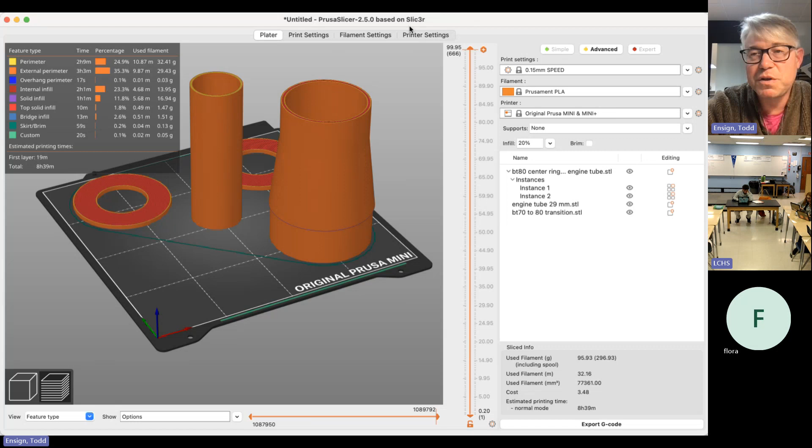All right, so that really is a crash course on how to use OnShape for designing the critical parts for your TARC rocket. I'm happy to entertain any questions you guys have.

Are we allowed to use any other 3D design platforms, like say Blender? So Blender is a graphics program, not a CAD software engineering package. So I would advise against Blender. I would use Autodesk Fusion 360, Autodesk Inventor, Pro Desktop, Pro Engineer, OnShape. There's a variety of packages.

I would try to stay away from things like... there's a really easy one that kids use often, what's it called? There's some packages. There's Google SketchUp, which can create 3D objects, but it creates sometimes shapes that are impossible to print.

Remember how the software, the CAD package, would color in a shape when it was like, oh, that's a complete shape, there's no gaps. Google SketchUp won't do that, and so it'll generate a 3D object that you bring into the printer, and the printer says, I can't do this. There's problems. I'm gonna just squirt plastic in midair. I don't know how to handle a shape with errors.